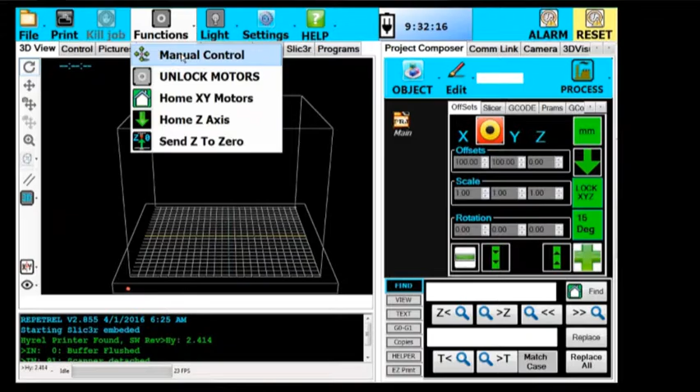The print button starts your job, kill job will stop it. Under the functions, most of these functions that you see here, except for unlock motors, are all available on the manual control tab, which is our second tab on the left side.

If we want to manually move the bed around, whenever a movement is made, the motors remain locked in place, and you'd have to come here to unlock your motors in order to allow you to push the bed around or the yoke around by hand.

The light is for a work light, which is underneath the Y arm on the printer, and you can turn that on or off. If your emergency stop is out, you can turn that on or off. And you can also use this to test sensors. We can make another video on that, testing the sensors. It's not critical for most people to do.

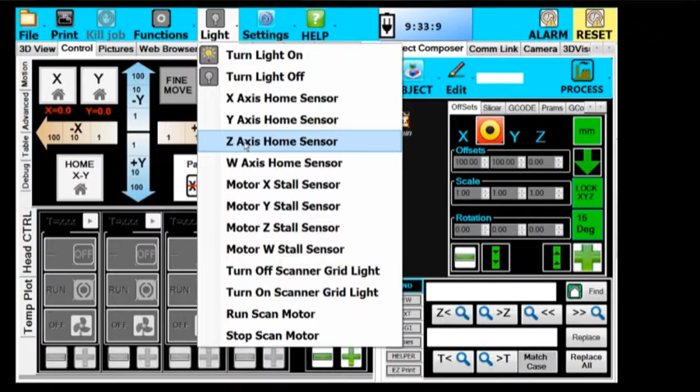Note that there is no W axis on most models, and there's also no scanner, so just ignore those options. Also be aware that the Z-axis home sensor is not the same as a zero position sensor. We have 5 home sensors on the Z. You don't really need to worry about those.

Under the settings menu, this is where we check, most importantly, to see what version we have. This is Repetrel 2.855, the current production release, although we expect a new one out before the end of the year, 2016. This update button is not working on this version.

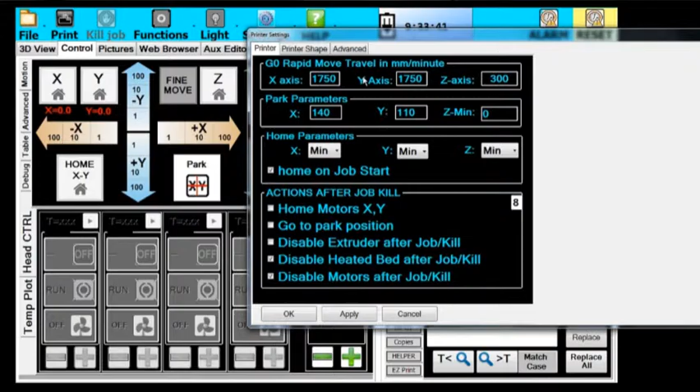Also on this menu, you can go to your printer settings. These will be pre-configured on your device. You can configure them to your preferences. If you make any changes, you want to click Apply and then OK. This includes the printer shape, which, like I said, will all come pre-configured for you.

Also, if you want to reposition your window, this software window takes up the entire screen on the tablet, which ships with every printer, but if you're running it off a separate desktop or laptop computer like I am, you can come to settings and change your border style so you can reposition your window and put it somewhere else or minimize it.

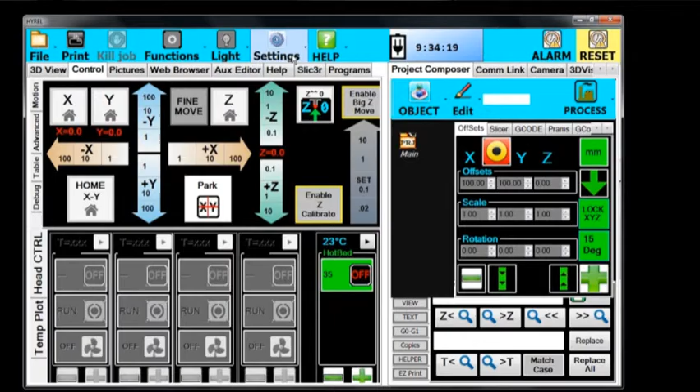Finally, under the help menu, we have some PDFs available. We have tutorials including an overview of this first training session. This PDF will load here in your help window. You can also view it outside the program as a PDF viewer.

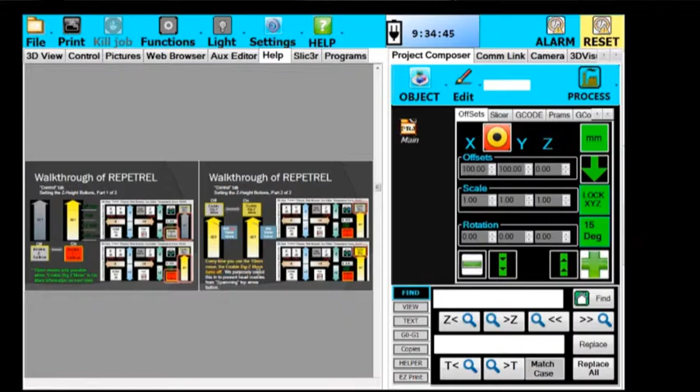And this just goes over all the important stuff on the hardware and software and goes into the rest of the first training session, where you make sure your bed's level, set your zero position, and load plastic and make a print.

This details how to do the bed leveling with the digital tramming device. We're shipping the analog tramming devices now, but the process is the same.

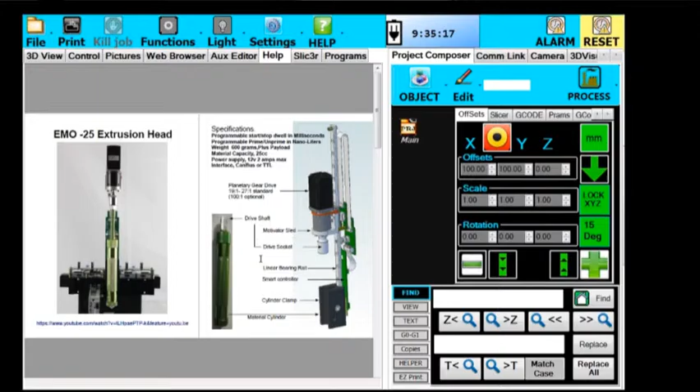We also have accessory manuals. If you want to look at the EMO 25 manual, for example, this will show details on what the parts are called, what they do, the theory of operation, some information on the Luer tips that you can use with these heads, and basic printing tips. There's really no maintenance except it's important to clean your material out at the end of use. Here's an assembly diagram with our part numbers in case you need that information. That's most of it.

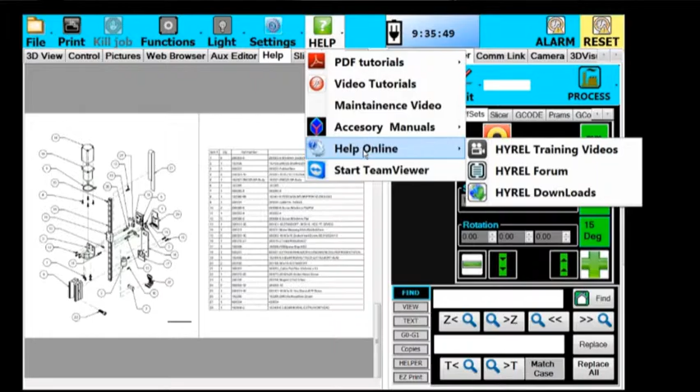You can jump to TeamViewer, so if your printer is online and you're not behind some secure restrictive firewall, you can give us your codes and we can jump into TeamViewer and help you change some settings or do some troubleshooting if you need to.

That's most of the stuff on the help menu. This is your clock, because we auto-hide the menu, so it's nice to see what time it is. This is an AC or battery life indicator.

The alarm button doesn't do anything right now, but it will let you push Repetrel to the background. So if you have another window open and it's maybe a confirmation box or something that gets hidden behind Repetrel, you can just click the alarm button to force Repetrel to the background so you can find those hidden windows. You might not have a keyboard, so Alt-Tab might not be available to you.

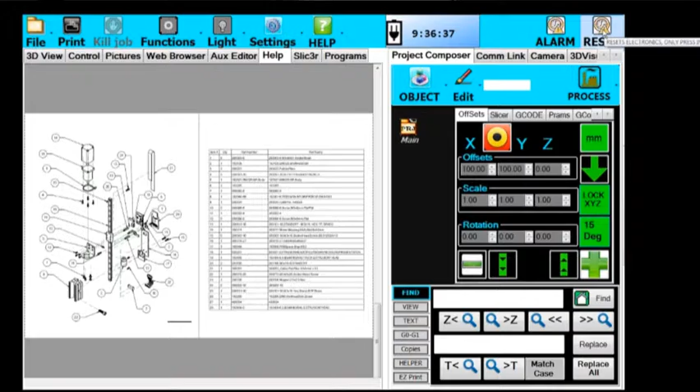The reset button will do a soft reset of the motion controller. So if we look at the connectivity to the printer and click the reset button, if there's anything with a communications issue, the majority of the time that will clear out those issues.

On the left side, the first tab is 3D view. In here we have a rendering of our build volume and also a limited log of communications between the printer and the software. You can see we started the program, it automatically connected to the printer, it tells us what firmware is running, the buffer's flushed, and it connected a couple times because I did a reset. There's no scanner, so just ignore the scanner message.

If your mouse is installed, you can left click to change your orientation, and right click to reposition your model, which I don't have loaded yet, so let me load one.

On the right side, I'm going to Project Composer. I'm going to open a GCode file, and run this same one that we see in the other videos. I'm also going to load an STL file.

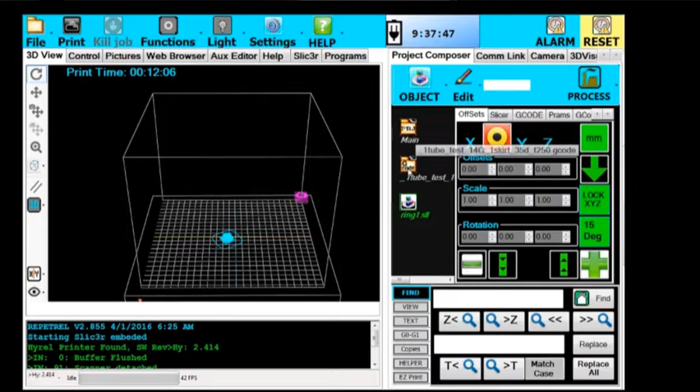Now left click will reorient the view. A right click and drag, whichever model is highlighted, will reposition that. If I want to use my scroll wheel, I can zoom in or out. I can also drag to change my point of view, rotate it around, zoom in, and we can see that.

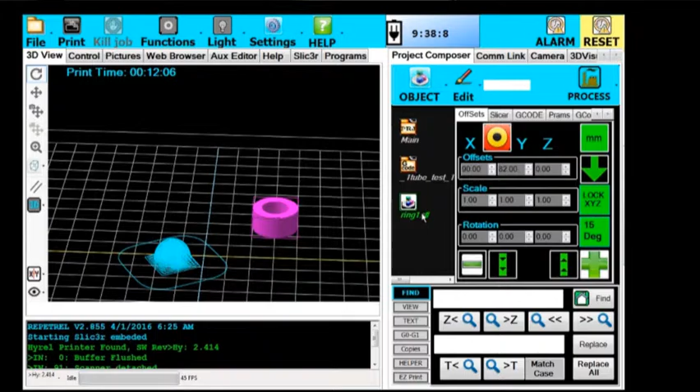The control tab gives us manual control over the printer. If I load a print head, which we'll show in later videos, you have control over the flow rate, the prime and unprime settings, or advance and retract, temperature, fan speed, and a bunch of other controls here. We see the hotbed is here.

We can look through the hotbed. It's currently set to default to 35 degrees, and that's really the only important thing on the hotbed. If I make any changes, I can right click on the flash button to set those new settings to the printer and make that a new standard. So if I come back to the main page, I can turn it on or off at 35 degrees.

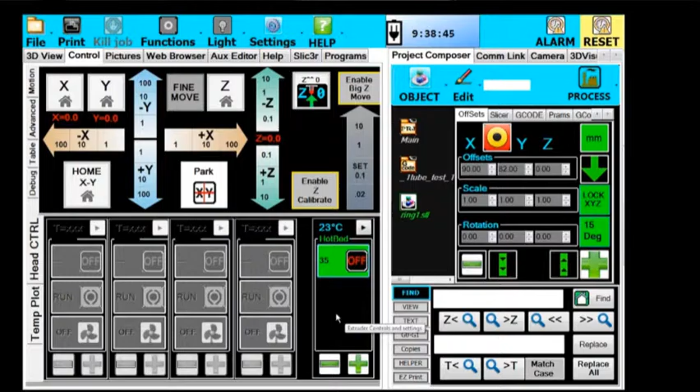Let me jump over to the right side. If I look at my Comm Link tab, if I want to see what I'm sending to the printer, I can click the transmit button. Now if I turn that on, change the temperature, and turn it off, you can see that it sent an M911, which means an emergency command.

The next command goes to the top of the print buffer and executes immediately. I set my hotbed to 35 degrees, then when I click the plus arrow, another emergency command sets my hotbed to 36 degrees on tool 91, which is the hotbed. Finally, I turn the hotbed off when I click that button again, and clear out this text.

I can also home my X and Y, and I can go ahead and park, which will bring tool position number 2 to the center of the bed. If I want to make relative moves, I can go 100 millimeters, 10 millimeters, 1 millimeter. I can also go to a fine move where I can go down 5, half a millimeter, 0.05 millimeter, or 50 micron adjustments.

You can see the GCode commands that Repetrel sends to the printer. Each one says go to relative distances, do a G0 rapid non-printing move, and on the y-axis a negative 0.05 millimeters, then go back to absolute coordinates. So that's what all that stuff means.

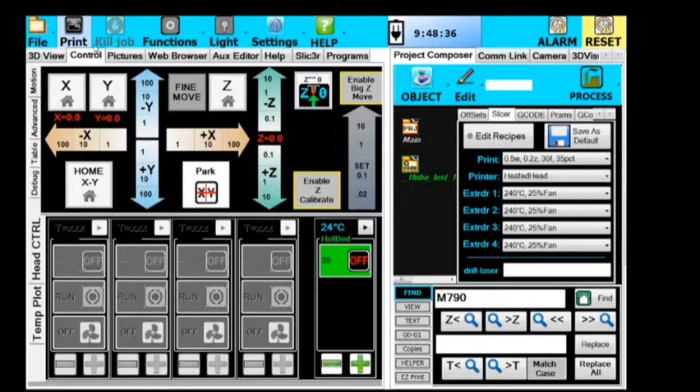That's it for the left side. The right side, the Project Composer, is the tab we stay in most. Normally you'd bring in an STL file, scale it, position and rotate it with your offsets, then come to your Slicer tab, pick your recipes, tell it to slice, and you wind up with GCode like we have here. If you have it selected, your GCode shows up over here.

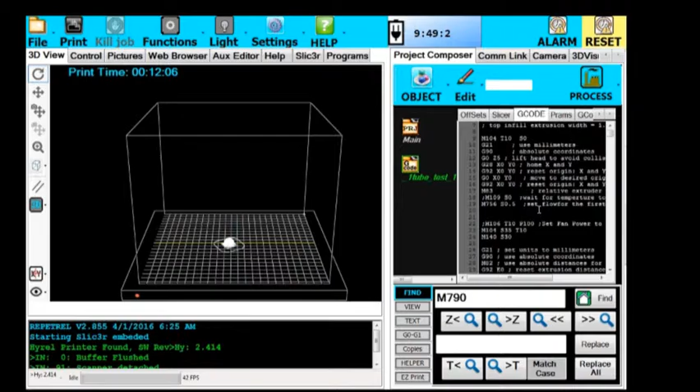There's some post-processing you can do right here. It won't matter with this file, but if you have something for a filament head, sometimes Slic3r generates code with really small non-printing moves, so you can come to your G0, G1 tab and set your limit to 10,000 for upper feed rate. Say you want to change all your printing moves - right here, all our printing moves except the very first one are set to 250 millimeters per minute. If I want to set that to 500 millimeters per minute, I can just click that, and now all my print moves are set to 500 millimeters a minute.

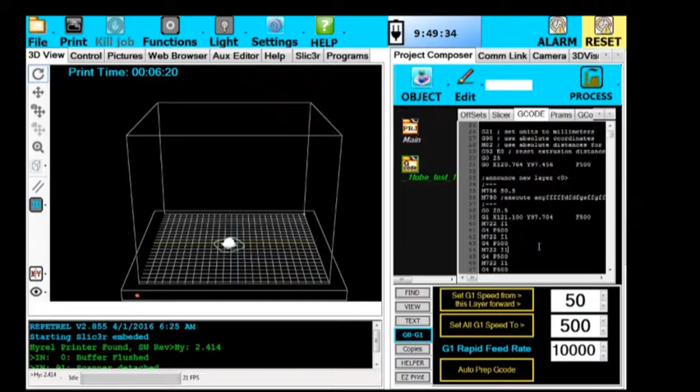This is a way you can take the same G-code and slow it down or speed it up without having to reslice the entire object again. We also have a button called Auto Prep G-code. This will parse all of your G-code, and if it finds any really small non-printing moves—in this case it found 22 of them—it'll add an E value to those moves so we don't have to do an extra advance and retract or prime and unprime that often. It just keeps on printing for that really tiny move.

That's it for most of the Project Composer. You've got a variety of tabs here that most people never use, and we'll get into these features in a later video.

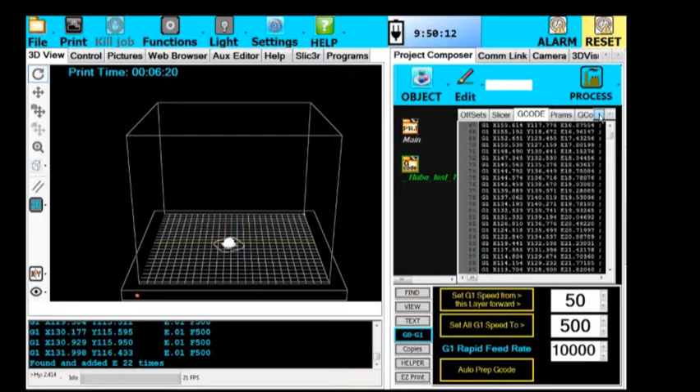In the Comm Link Tab, I told you how we can show what we're transmitting to the printer. We can also see what we're receiving back. Every few seconds there'll be a status report from the printer. Since I have no heads loaded, it's only giving me a status from the Hotbed controller, which is tool 91, telling me I'm at 24 degrees. Now if I turn that on, we'll see this number start to creep up, and over here that number will start to increase.

And we have a temperature plot, and you can use your scroll wheel to affect the scale. So you can see the bed's been at 23, 24 degrees. I recently set it to 35.

I can even enable the duty cycle if I want to see the duty on the Hotbed controller. So now it's running at 80% as the temperature increases. As the temperature gets close to the set point, you'll see that arc level out and the duty cycle drop. So we're at 31, we're getting closer.

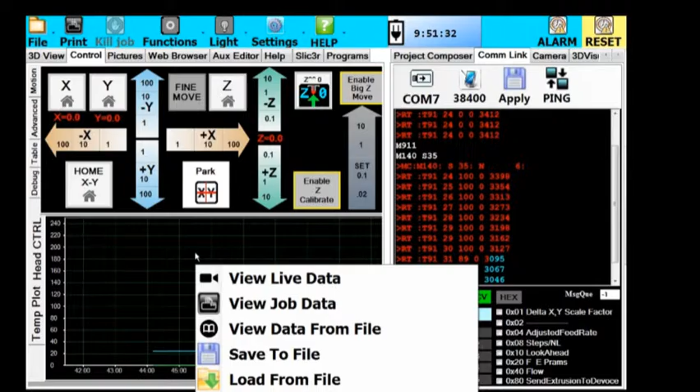You see the duty cycle dropping off as the temperature approaches your set point. This data can be saved to a file. You can view the file you saved before, and it'll track the data from whatever heads you have loaded, and you can tell it which heads to show or not show based on whether they're loaded. Now we're reaching our temperature, so the duty's dropping off. Okay, I'm going to turn that off—we don't need to see this stuff right now, so I'm going to clear that text.

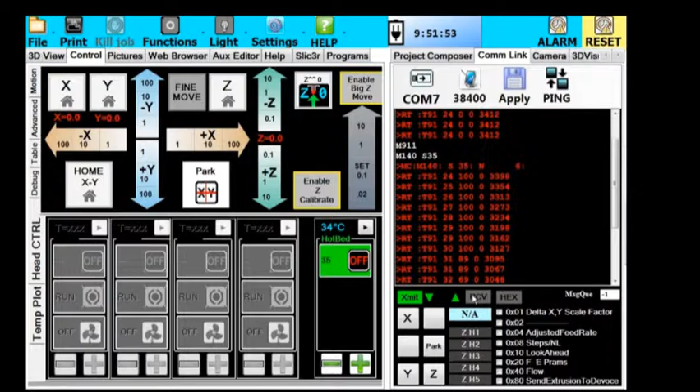We're going to move over now to the hardware. I'm going to explain the features of the printer.

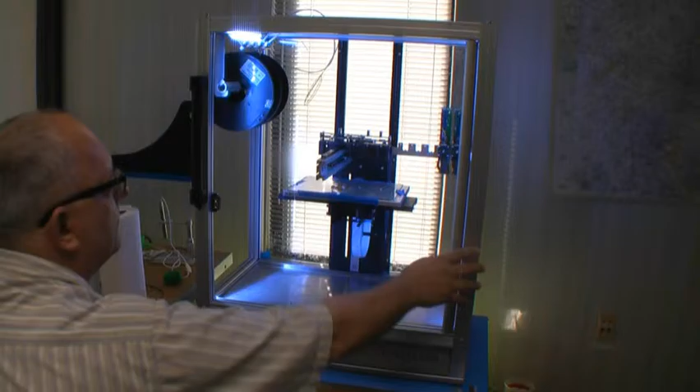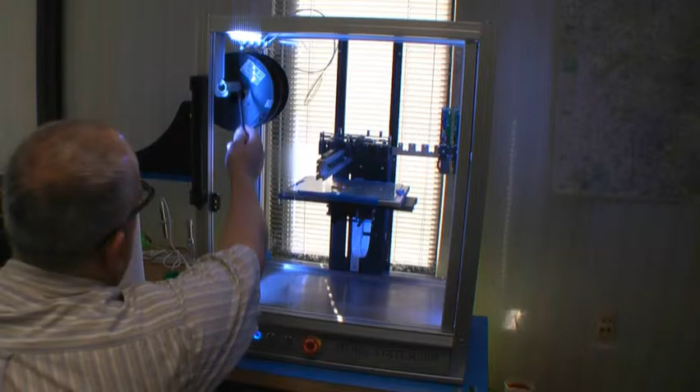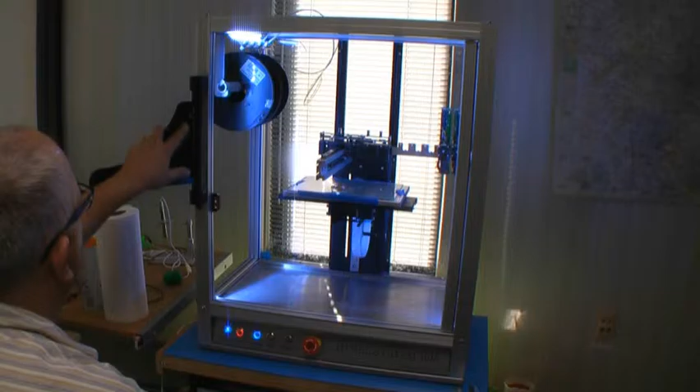This is a System 30M, and this isn't even the current configuration because the material spool is different in the new printers. This rod is mounted to this extrusion on the side, and we have a different bracket that holds the feed tubes, the guide tubes. This is where your tablet would be mounted, but I'm running mine off a USB cable from a desktop computer—your tablet would plug in here so it can communicate and be charged all the time.

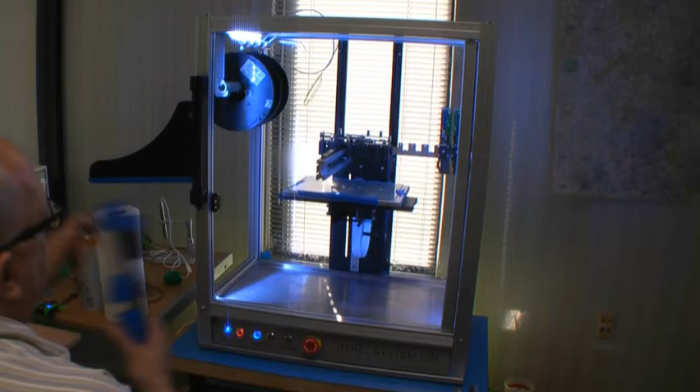All the plastic parts you see on the printer are actually printed on the printer. The same goes for the plastic parts on any of the print heads, because we test each print head and each printer by printing production parts.

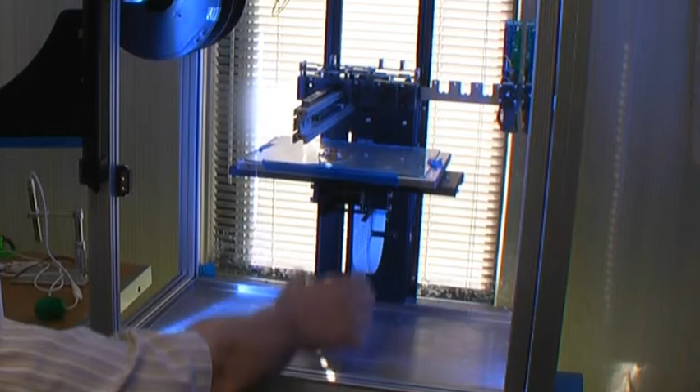This is our bed. We engage the e-stop to unlock the motors. The bed moves left and right, and this whole thing moves up and down in the Z, while your print head moves forward and backwards on the yoke and the Y-axis.

Each yoke can take up to 4 heads, and you can put them where you want. There are USB ports on the top—they're not associated with any particular head. They're just there in case you want to plug in a thumb drive, or you've got maybe the inspection microscope you want to plug up. It takes this communication over USB, or some future item we may add.

This is a steel tube, a 2x3 inch tube. It's mounted on a 24 millimeter wide bearing. We call this the X arm. It goes up and down in the Z, and this X table or bed moves left and right on another bearing, a 12 millimeter bearing. Attached to this is your aluminum heated build plate.

In most situations, this will get up to 80 degrees C. If you enclose this, normally enclosed in acrylic or polycarbonate, and if you have a heater in here, you can get the chamber up to 55 degrees C, and the bed will get up to maybe 85 or 90 degrees C.

This is the hotbed controller, so it controls what temperature it is, how hot you set it to, and manages the power for that.

This aluminum plate is supported in the center by a fixed post, and each corner is adjustable and spring-loaded, so that makes it easy to adjust your zero position, make sure the bed's flat - we'll cover all that in another video.

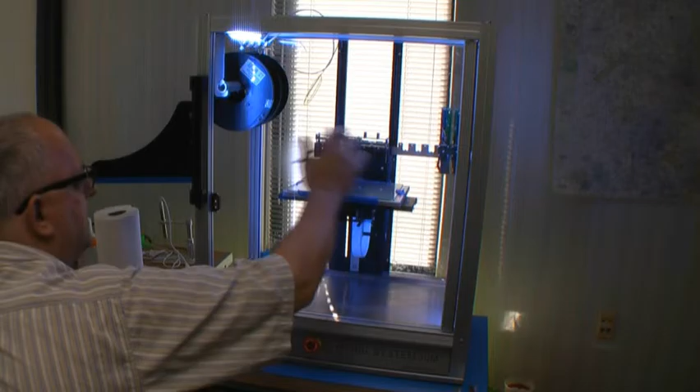The extrusion is all our custom design. It's slotted to allow for the panels to slide in and slide out. There's usually a big door here that I have taken off just to make it easier to show people things. There's some additional tool storage on the right.

There's some stabilizers in the back to keep the x-axis from moving, or the spine, which we call the z-axis, which holds the x and the y components, to keep it rigid.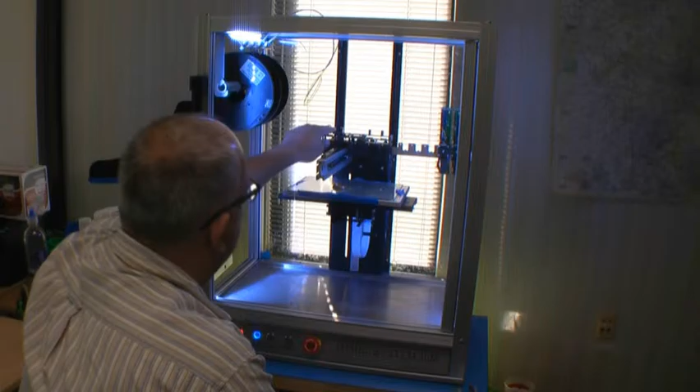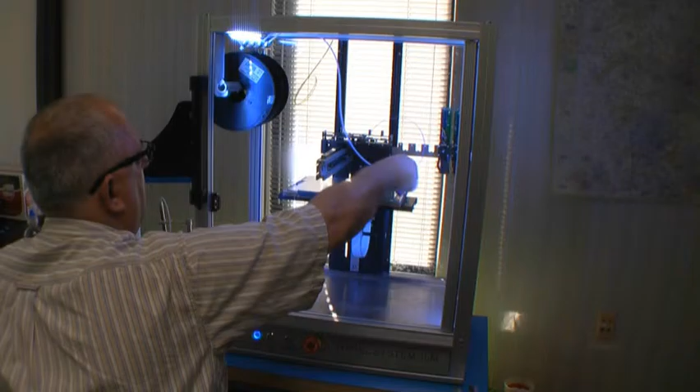The spool over here holds your filament. If you're doing filament-based printing, it comes through a low-friction guide tube and just seats into the print head. We've got videos on how that works. And there's a top sheet that's normally on most printers.

Down here, the emergency stop cuts off all the 12-volt power, so that disables and de-energizes the motors and the heating elements. The power button will bring the printer on and off.

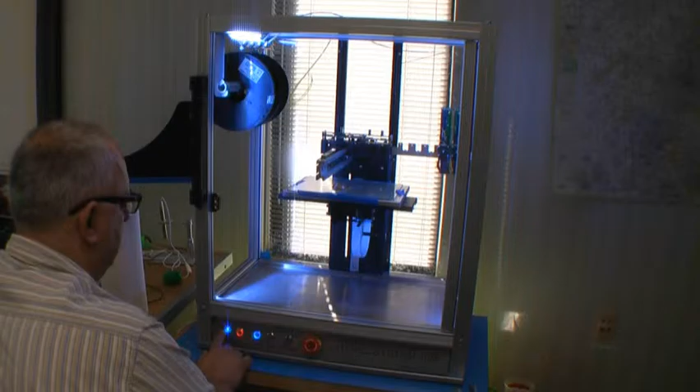The reset button will force a reset of your motion controller. When you do that, you'll also lose whatever zero position you had set, and you'll be reset. The current position will become your zero position.

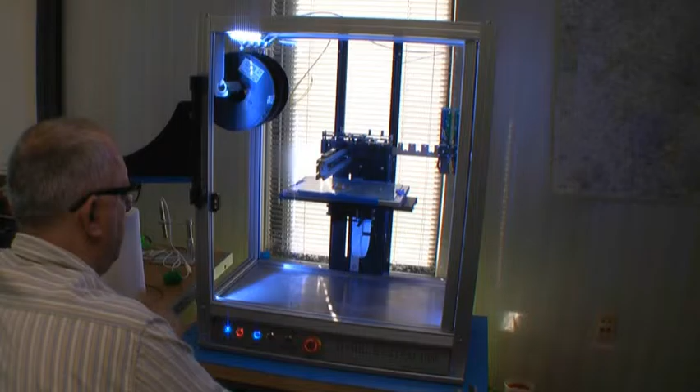The chamber lights can be turned on or off with this button. We've got an auxiliary button. Some people wire that up to power for their heater - I think the heater is too powerful for that, but the air filter sometimes runs off of that.

Some people have elected to swap out the white light LEDs with UV LEDs for photo initiation of cross-linking. That's an option that you have.

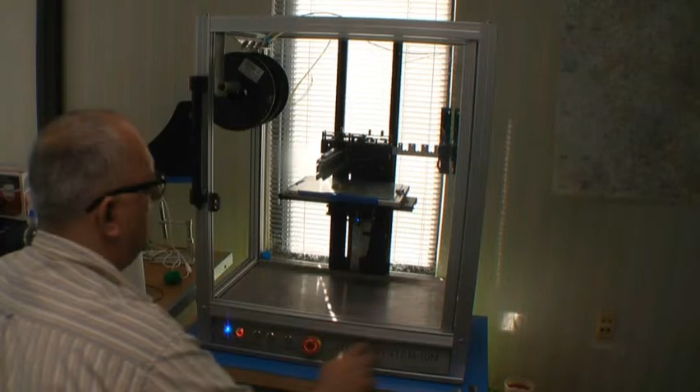And there's a drawer here for storage, for all the stuff you want to keep in there. And over on the left side, we've got a USB connector if you want to drive - you can drive the printer from a desktop computer.

There's your power supply, your power on off switch, and some more USB connectors. Finally, on the yoke, on the spine, we have some additional connectors here.

There's a DB9 for old school connectivity. We actually have one user who's using that because they broke their USB connector. There's a USB connector down here where you can run the entire unit from another computer if you have a problem with your interface board.

I should pop this up and show you what the guts look like on the inside here.

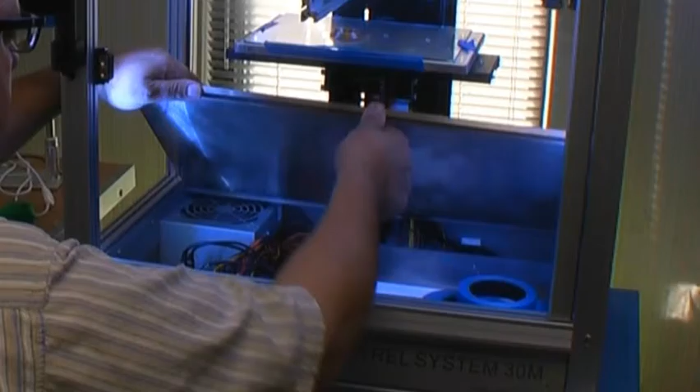So under this stainless base plate is the inside of the drawer. We've got our power supply, our wiring harness, and I've got a little bit of debris in here. This is our tablet interface board.

So the power goes to here. The tablet or the PC you're running with controls through here. And then we have dual USB connections that run up and talk to the spine and also to the yoke. There's some wiring from these buttons to the panel. Nothing overly complex, but it's pretty simple and it does the job.

Older models will have, instead of the tablet interface board, an actual PC motherboard with a SATA drive on it, but we haven't shipped those out in a couple of years.